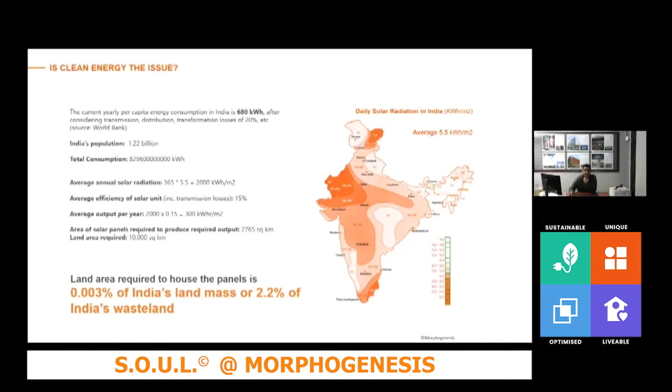We were looking at our cities, and we were looking at our buildings, and we had developed this system where our buildings would consume energy and they would consume water and they would generate waste, and it was a one-way flow. What you see on the top here is through this process of sustainability, where our main aim has been to push our projects to net zero energy, net zero fresh water, and net zero waste to landfill.

Optimization has been mostly about how do you build less? How do you do a lot more with a lot less? And essentially, that's about removing embodied energy, and that's about reducing CO2 emissions from how you build something. Uniqueness is about, again, a set of metrics which looks at tradition, heritage, and culture.

And that third philosophy and third arm grows from the fact that across India, given that price points of construction are extremely frugal, everything started looking the same. It didn't matter whether you were in a cold climate, a temperate climate, a hot climate, or a warm, humid climate. By and large, most buildings started looking the same. And that's because they were adopting processes of construction and design that allowed for that to happen. And we found ways of digging into the past to find ways to build the future. And that's where we got the unique.

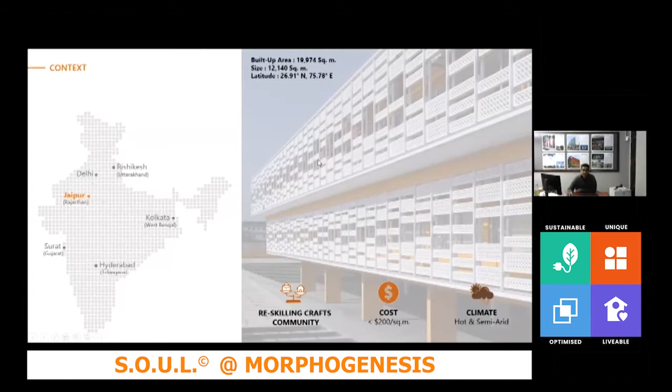And of course, a climate like Jaipur, which goes up to 48, 49 degrees Celsius in the summer, but can drop to close to zero in the nights in winter. And we began thinking about how we are going to be able to build this building. And the first thing that came to our head was to throw out the air conditioning.

Because you throw out the air conditioning, along with that, you reduce all the electrical equipment, but more so, you reduce the fact that the power generation is also done locally. So you have these diesel generating sets that generate that power, and you get rid of that as well.

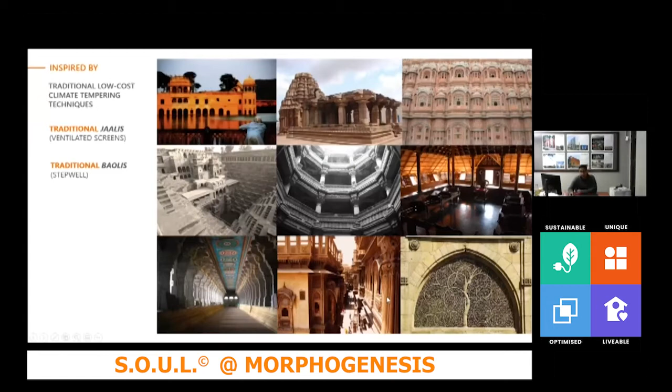And we studied a lot of the traditional architecture. We used computational models to understand how step wells work, why they are cooler at the bottom than the top. We understood evaporative cooling, jalis, ventilation, shading. So we mapped out a 200-kilometer radius. We said every material that we will use will come from that, because transportation costs are extremely heavy.

And the other thing that we discovered at the time was that the temperature of the Earth about 3 meters below the surface is equal to the average temperature of the region. And in Jaipur, like I said, which goes from 0 to 48, 49 degrees, the average was floating around 25.

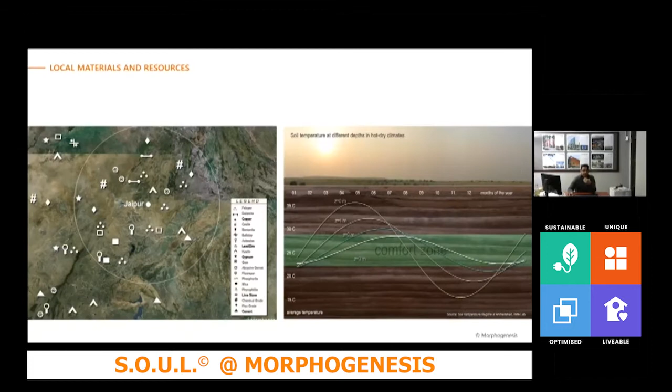And we said, hey, that's very useful, and which is why the step wells, if anyone has visited India and you go to the step well and you come down, it naturally feels cooler because the earth banking along with evaporative cooling is a phenomenal cooling mechanism. It's an underground air conditioner, naturally driven.

So we said, fine. Now, typically speaking, any institutional building in India would be built as a block, and then you would have the open space, which is the recreation space. But when you're in a desert climate, that open space is really worth nothing. And these large outdoor spaces become mostly unusable through the year.

And we said, well, we won't do our building vertically. We'll spread our building out and use the whole building as a shade, like a tree. And therefore, the space under the building will become viable. We did a very optimized, simple rectangular form. The idea was again to decrease the amount of surface area that gets exposed to heat gain.

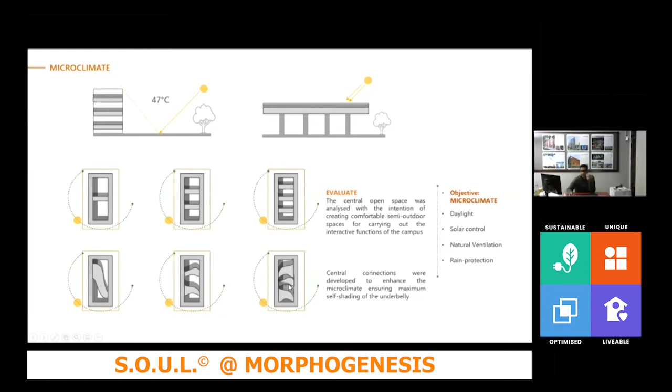And we went through a series of courtyard morphologies. The idea really being to keep the sun out, but let the daylight in. I'm not going to show you these diagrams. All of you probably know them very, very well.

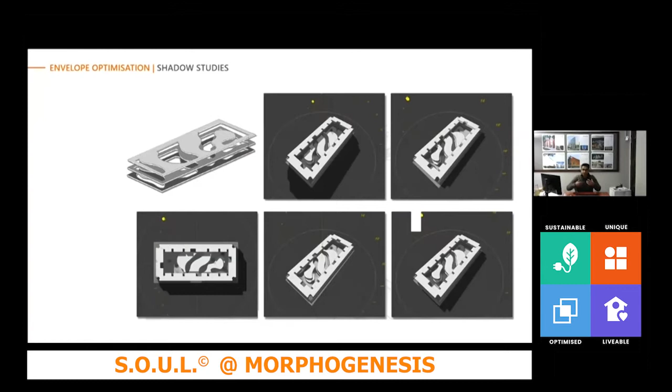But the idea really was to develop, and because it was a design and fashion school, the emotional element was that if you were inside this very rigid form, which was driven by our environmental criteria, the courtyard should not be like a rectangle and enclosed. It should flow freely like a Mobius strip. And that was the model when we began about a decade back.

To achieve the parameters of no air conditioning in a desert climate, we sunk down 3 meters. We recycle all the rainwater, and we recycle water from the toilets by filtering and using a treatment plant. And we created our own step well, a baoli, in effect, which allowed for evaporation through the courtyards and cooling the building internally. And that negative space, if I may, was pulled out of the program.

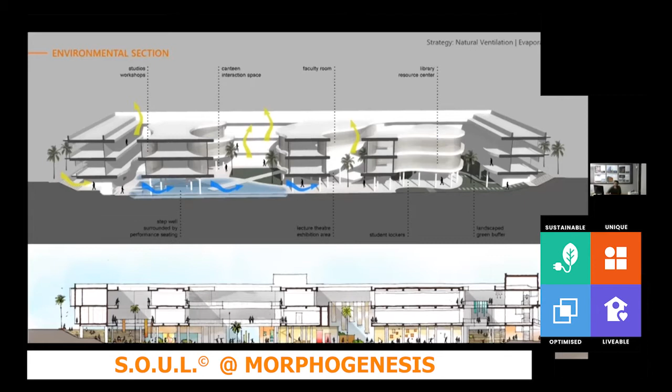So we were supposed to build about 25,000 square meters. We built about 2/3 of that. And that entire area underneath, which to date operates at about 28, 29 degrees Celsius naturally, is used for an outdoor cafeteria, for various functions, performances, etc. And that whole underbelly section was designed to do that.

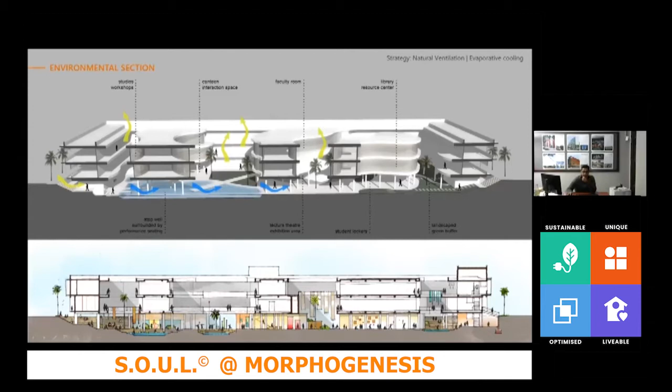These are just some of the pictures of that step well that we created. All the water is harvested. Not a single drop of water leaves the site. We were just trying to work with limited resources effectively. And obviously, the whole thing sits in shade. It captures the wind flows and it cools the building down.

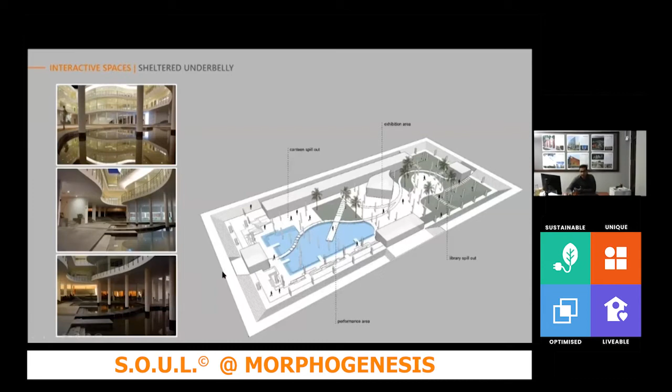We looked at insulation. Insulation was very critical for a project like this in a desert climate. And there was a local community that made pots. We couldn't afford the very expensive 50 mil glass wool or rock wool insulation. And we thought that pots, which were used traditionally, would make for great insulation, because air is a great insulator.

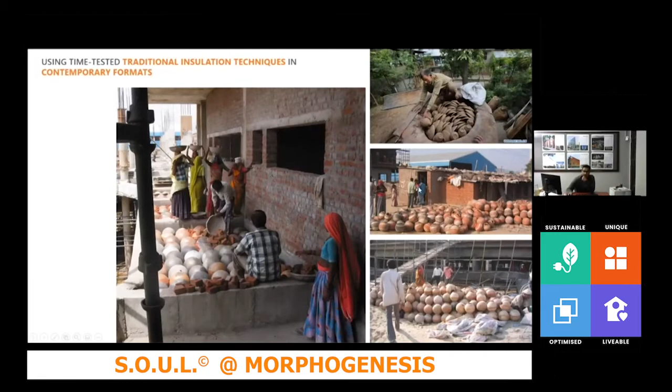And we use these inverted pots with a layer of screed on the top, and we use that for insulation. The pots were made on site by this local potter community. For the external skin, we kept our window-to-wall ratios very, very optimized. We are at about, I think, 20 or 25%, providing adequate daylight.

And we created this buffer space, which is essentially a service space and a screen. And the screen is made from, again, a set of local community who make cement concrete jalis on a very simple system. And we ran all our services on the outside. So the screen allowed for the fact that the entire windows go blinds free, and the design of the screen changes based on the orientation. And all the services are openly accessible.

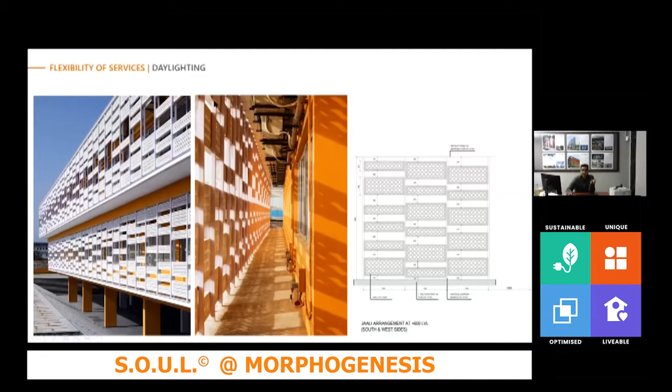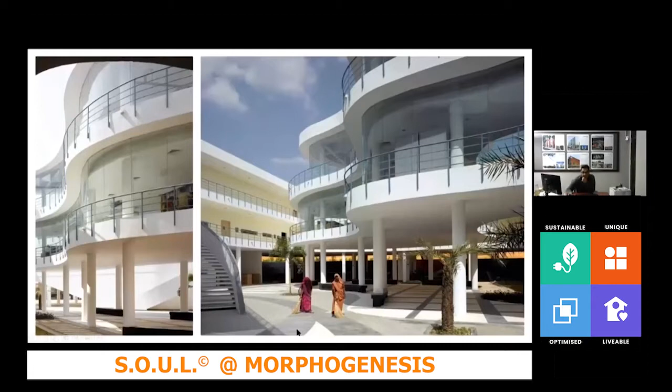The sprinklers run here. We use the sprinklers as a facade cleaning system, because once a month they are supposed to test and flush it. So that sort of cleans that up. And that's the building when it was finished about a decade back. So everything here was from within a 200-kilometer radius. We did achieve the price point.

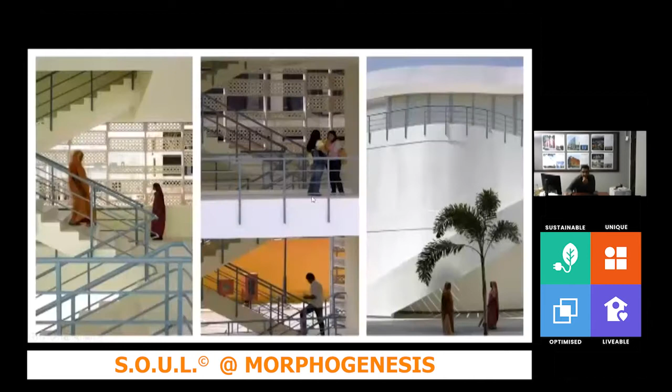And this building went on to become very popular with various schools of architecture. They've gone and studied it. We've had students from various masters programs studying sustainable design, recording temperatures and seeing it. And for the last decade or so, consistently in the summers, when external temperatures have hit 47, it's hit 29 degrees inside without air conditioning.

It runs on an energy performance index of about 25 to date. Very simply, we get the bill and just divide it out. And whilst it was being built, it gave a certain level of employment to the local community. And that gave us a lot of inspiration.

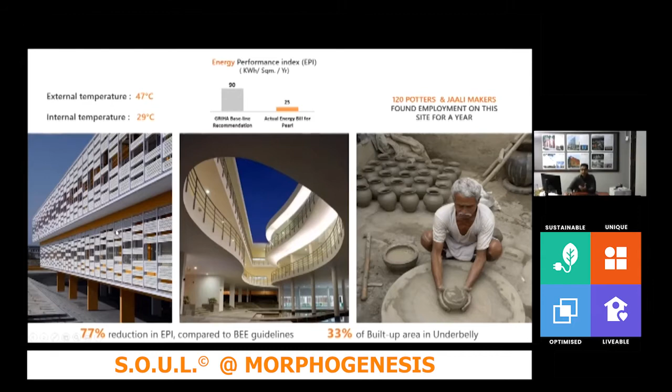And we thought that, if it was possible to get an 18 degrees delta by passive design, and it was possible to create something in these kind of price points pushed by the adversity of price, then what is it that we could do as we moved on? And that's when we started putting more formal metrics. Which is why I'll jump to a very different kind of building, which is the British School in Delhi. That's a composite climate.

And here, budget was not an issue. And our brief was, to begin with, because it was the British School, that they wanted it to be centrally air-conditioned. All British schools pretty much across the world are either centrally heated or centrally air-conditioned. And we argued that if we can achieve as much as we can naturally, then we will do so. And this project is about, I think, 6 or 7 years ago.

And we then spoke to the clients, which was essentially the High Commissioner and the board, and we said, why don't we look at this 5-acre site and try and do India's first net zero energy, net zero water, net zero waste to landfill kind of building. And they said, fine, let's give it a shot.

And so we did the math on the water, and from the 5 acres of land that we had, I'm not going to go through the calculations, but we could support a population of about 1,300 students. And we said, we'll do this in reverse. The notion of carrying capacity comes from the fact that what the land can afford in terms of water and energy is all that we will build. And 1,300 students worked very well for them.

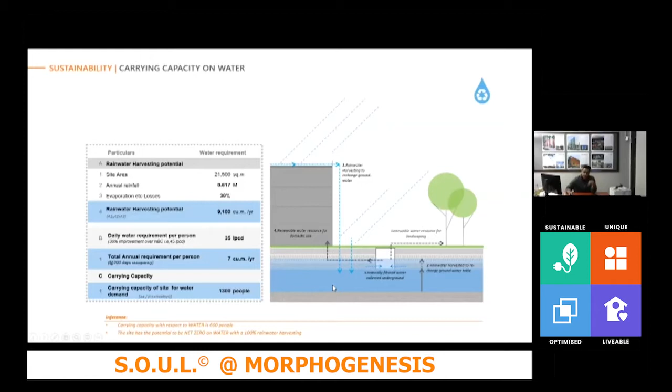Now the problem with a city like Delhi is all our rain is concentrated in 3 months. So you can't store that much water for the rest of the year. So what you do is you dig down and you find an aquifer that's pure, and you use that as an underground tank and as an exchange. So you put water back into it and you pull it out of it. And over the year, you go net zero on water for 1,300 people.

We took the same 1,300 people, and we needed to build about 20,000 square meters for fitting out an IB school. And we were trying to work out the correct ratio of rooftop solar to number of levels that we would need to get to net zero, and therefore the target EPI we need to achieve. And after a lot of to and fro, we came to a 4-story building with a target energy performance index of 56 kilowatt hours per square meter a year.

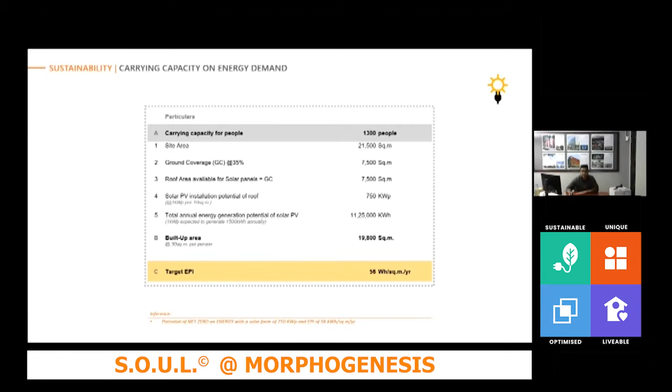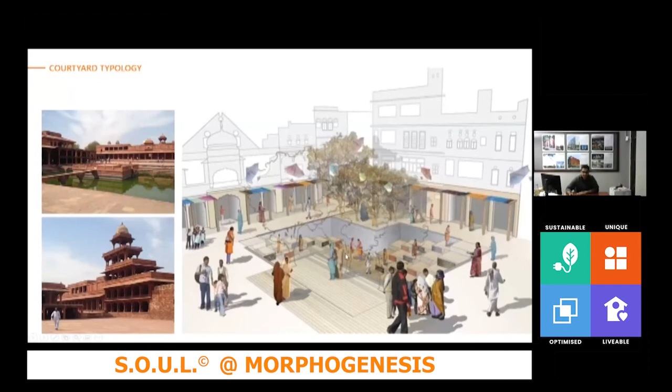Now, that number would by necessity drive a lot of passive design, where a lot of the heat loads and lighting loads would need to disappear. And that's when we would be able to be net zero on water, net zero on energy. And again, in Delhi, there's a very old city called Shahjahanabad. We looked at how those morphologies worked, how some of the earth banking worked. The other key area was safety and security.

And because we were propagating the idea of having open corridors, and we were not doubly loaded and had them air conditioned, the issue of security, CCTV cameras, and we came up with this idea. We didn't come up with it; we studied this idea of eyes everywhere. If you look at any old vernacular evolution of any city anywhere in the world, in those days when there was no police several hundred years back or CCTV cameras, the cities were designed in a way that there were eyes everywhere. And that really was a security.

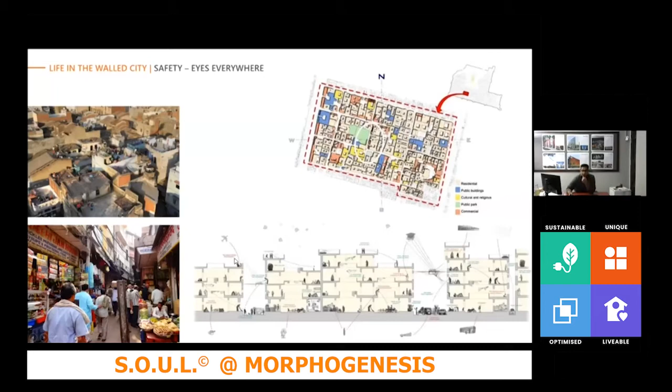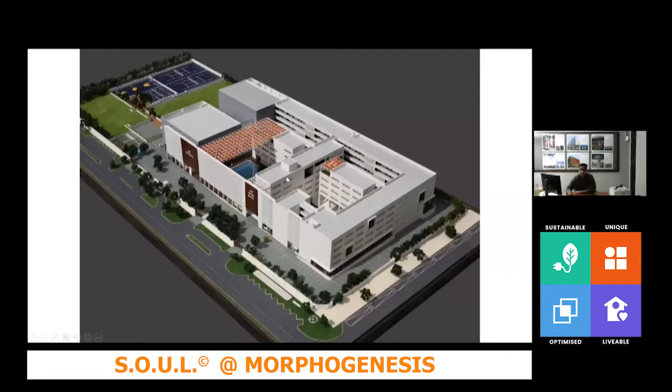So with a combination of the two factors, we began to look at morphologies where we would be able to get eyes everywhere, step terraces, shaded courts, and we landed up with this sort of model with a rooftop area sufficient to make this into a net zero energy project. Some other small things that we did: we put the labs on the top because the labs are constantly mechanically ventilated because of the fumes, and that automatically creates a buffer for everything underneath. We created natural voids for the wind flows to allow the courtyards to function properly.

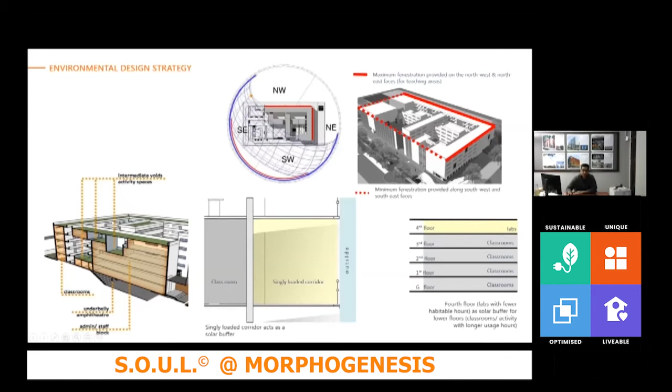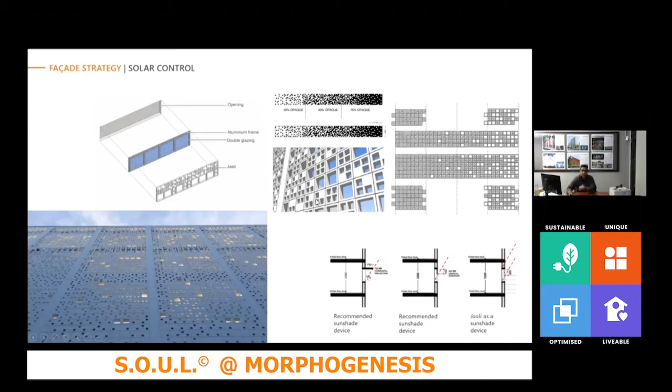And because of the orientation of the site, where we had pushed that form again like we had done earlier, we began to look at the Jali formation. Most of our teaching areas were on the northeast and the northwest, while the southwest was essentially a large screen just shading out the courtyards. A lot of this was built on site, so we came up with this construction methodology of again full windows and having a secondary screen. The screen, of course, varies its opacity and density based on what's behind it and what orientation it works to. And that's now the completed building.

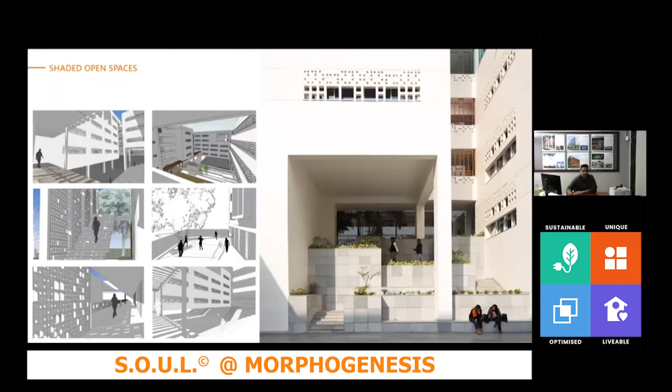We did a lot of modeling. So we had the classroom, and that was built. That was done perfectly, but to us, what was more important was to be able to create enough open spaces which would be comfortable through the year. We were targeting a delta of about 8 to 10 degrees in perceptible temperature in the outdoor areas in the school as compared to the external temperature. And then here's that project. That's the front screen that shades off the southwest and creates a cool microclimate behind.

Again, open corridors. What you see here are air filters because it was a British school. We didn't air condition the entire school, but we did for the classrooms, and then created these passive spaces. A lot of outdoor spaces. Now, this is a bit old, but the trees are grown now. And that's the school.

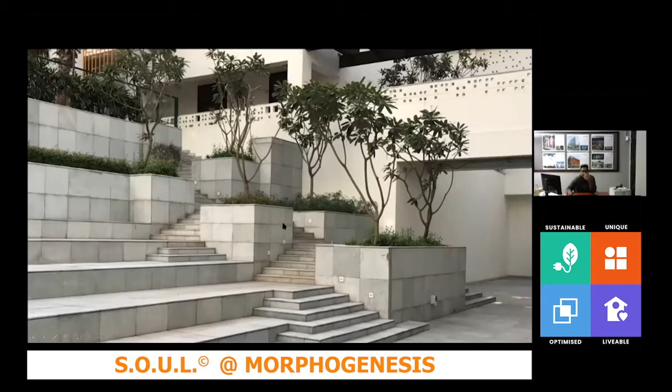Now, on our post-occupancy, we to date have an EPI of 52. It's the only school in India right now which got a GRIHA 5-star rating. GRIHA is India's own green rating system. And as I am a founding member of the green rating system, I can say that it is genuine. I didn't falsify any data, but it's operating at a 52.

Now, what you see here is a combination of surface temperature and air temperature, and then we map that back to perceptible temperature. So at a 44 outside, we did manage to get a 10 to 12 degree delta in all the open spaces inside that school. And we keep our classrooms at about 26 to 28 degrees. So there is a gradation as one steps out and moves through this entire project. And it operates today as a net zero on all accounts. So that was in that composite climate.

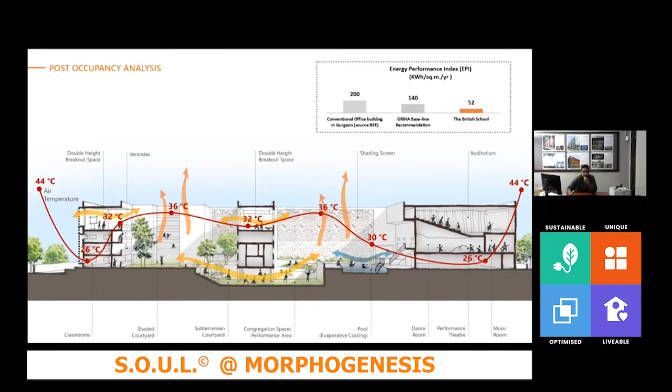In a composite climate, the winters aren't a problem. And it's not even the summer, because shade, thermal mass, screens, a bit of evaporative cooling, that works. The real problem has always been the monsoon. Why it works really well in schools is that Indian schools are shut in the monsoons; that's the holiday period. And that works really, really well, which it doesn't in other typologies like offices or residential, which brings me to this third one.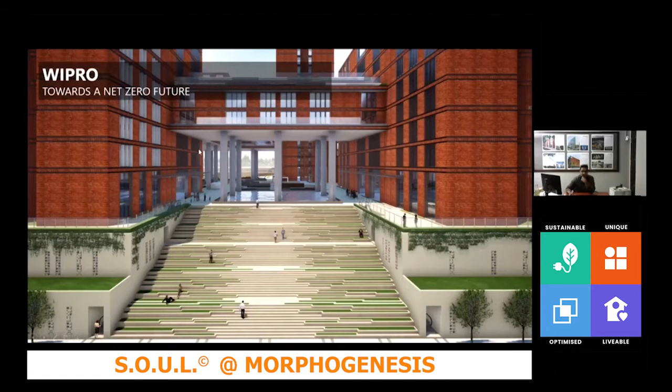This is a 100-acre campus for a very large technology IT firm called Wipro. They're amongst the three largest listed companies in India, and they do these really massive campuses, with tens of thousands of people working there. This is located in Hyderabad, in Telangana. It's a very strange climate. It's not very adverse, but it's got a tremendous amount of diffuse radiation. It has barely any cloud cover pretty much through the year.

And temperatures do go up, but it's not that high. And it has reasonable wind speeds, reasonable wind temperatures, but the glare is just incredibly high. The diffuse radiation is what pushes temperatures up. And we worked on this project with TransSolar. It's one of the several we've done with them. And this is where we began.

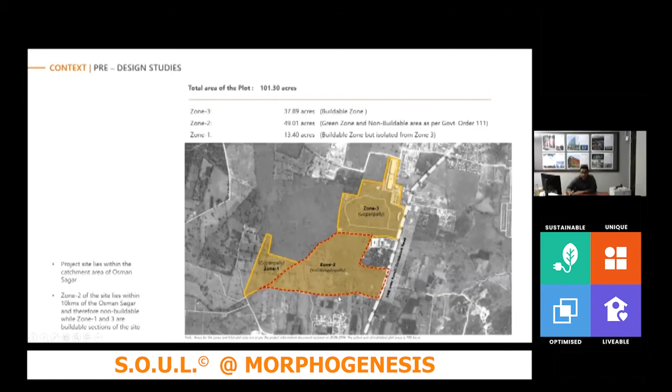So we looked at the site, and that's about 100 acres. It's divided into 3 zones. And zone 2, as we discovered, was largely unbuildable because it sat in a radius from a lake which wasn't too far away. And as we discovered, it's sort of a bit low-lying. And the really buildable areas were these 2.

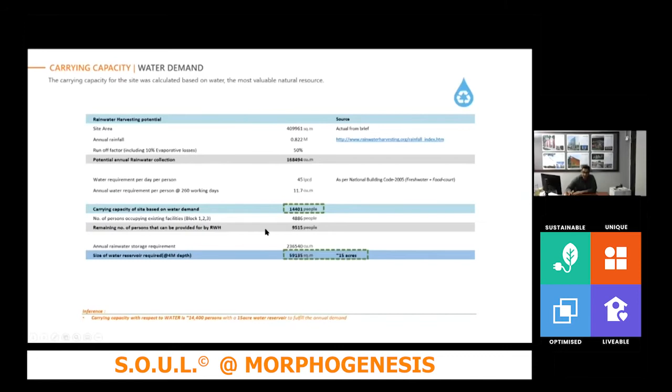We again pursued the idea of a carrying capacity. We had the 100 acres, and we worked out backwards as to how many people we can support from the rainfall. And to store that water, because, like I said, Hyderabad is very strange in the sense that its entire geology is slate rock, it was very hard to get to an aquifer and do water exchange with. So we really had to build a reservoir. So at a 4-meter depth, we needed about 15 acres of water reservoir to support 14,400 people working there.

And similarly with energy, we worked out that if we hit a 60 EPI, then with 15 acres of a solar farm, which we have planned over and above the water reservoir, so essentially the solar farm shades the water from evaporation and picks up the energy, we will be net zero on both accounts. And that's what we really did.

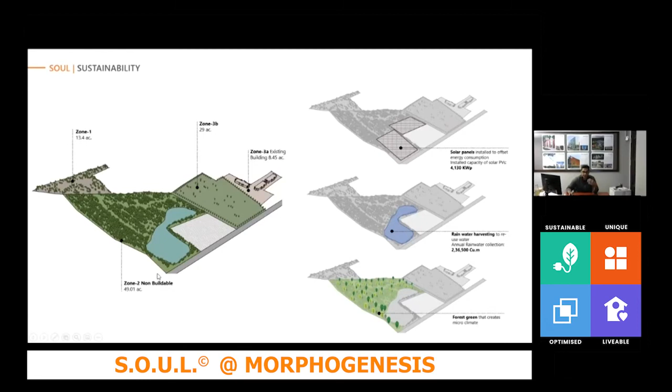So we identified the low-lying area. Everything slopes there. We got the natural rainwater. It's a 15-acre lake, about 4 meters deep. And then it's got the solar panels that sit on top of it and on the site and shade it. And that piece of the land will never get overshadowed. So we could do the solar farm, 15 acres, on the site itself. And that set up the basis of the first series of master plan.

The second exercise, as I'll just go back, was how do we begin to hit 60 kilowatt hours per square meter per year, of which 25 is on primary energy, which is lighting and air conditioning or ventilation, and the 35 is on equipment. And how do we begin to get our building to work with the 25? The 35 was a given, so that's all internal equipment.

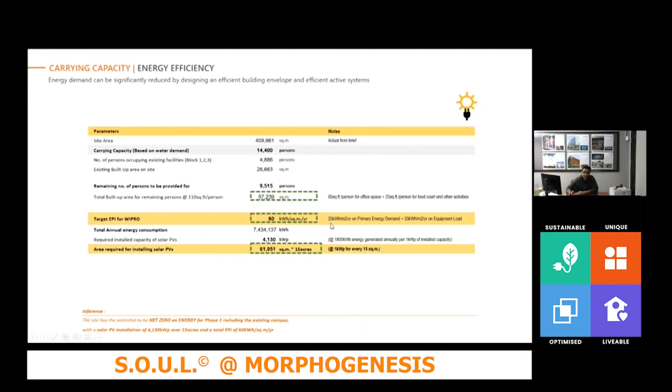The question really was, how do we work to 100% daylighting on the floor plate, and how do we bring our air conditioning requirements down through the year? And to remind you, these buildings tend to operate about 10 to 12 hours a day, 365 days a year, because they're essentially very large tech companies.

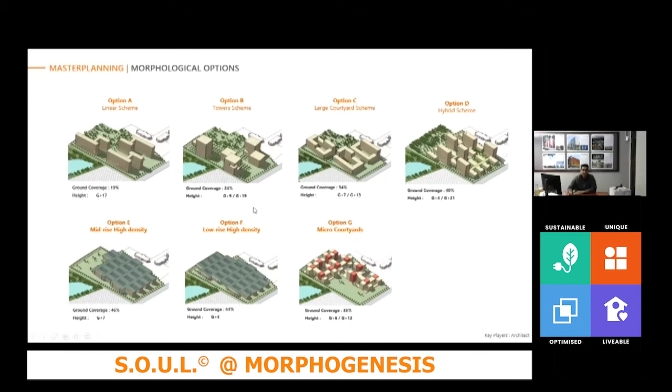So we began this exercise where we did about 7 of them. We did many more, but we isolated 7 morphologies: isolated single towers, series of square towers, courtyards, a hybrid of the tower and the courtyard, mid-rise high density, low-rise high density, micro courtyards, and we came up with several morphologies heuristically. And then we began to test them. So various kinds of ground coverages, various heights, and we then put them through a series of analysis.

So the first analysis that we did was, of course, for wind, because wind was critical. If we were to hit that 60 EPI, which is 25, we also needed to be able to get a lot of the functions from inside the building out, and a lot of the functions to run passively without air conditioning. Of course, where the essential work was happening would be air conditioned for various reasons, their data centers need very tight control on air conditioning, etc. But how much of this could be, and for that we needed the wind.

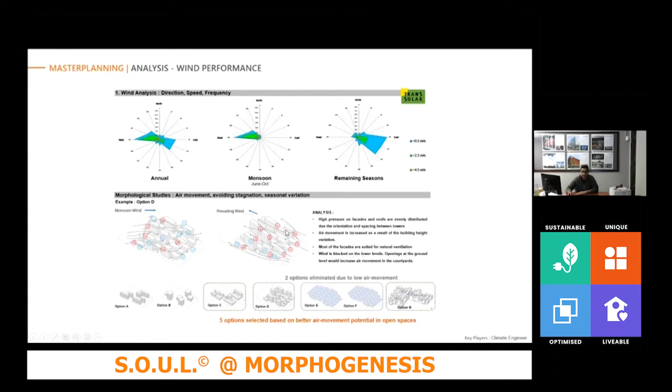Now, predominantly Hyderabad had an east-west wind, and we put all these various forms, and we selected 5 that performed reasonably well. We then put them through the horizontal plane. We were trying to look at what, in terms of seasonal solar radiation, the insolation would be on the lower planes. And based on that, we picked up a certain scheme.

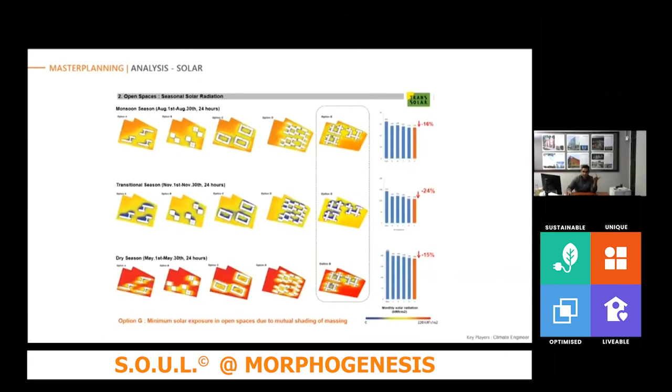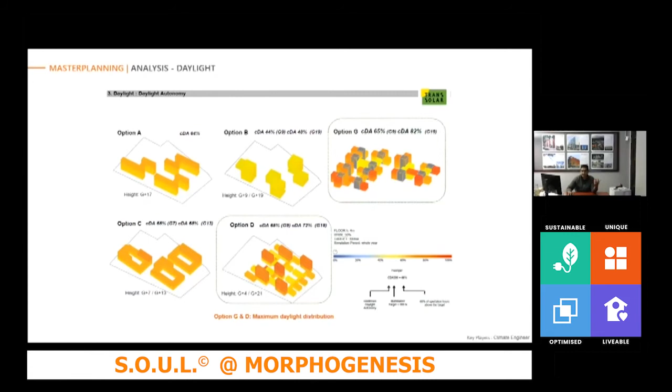We then looked at daylight autonomy for each of these 8 or 9 different schemes, and then again began to identify. And this was a highly iterative exercise between wind, solar radiation in the open spaces, and daylighting within the internal spaces, and what morphology would suit it the best. And finally, we selected the option which was the micro courtyard option.

And after doing a series of CFD runs on it, we cleaned up the entire model. Again, this was highly iterative. And if anyone is very good with algorithms, this is a great one for that kind of process. And then we finally ended up. So the first phase is what is now under construction, which I'll take you through. And we've already done the urban design for the remaining 3, so that, in a sense, the wind flows, the evaporative cooling, the shading, all those parameters remain the same.

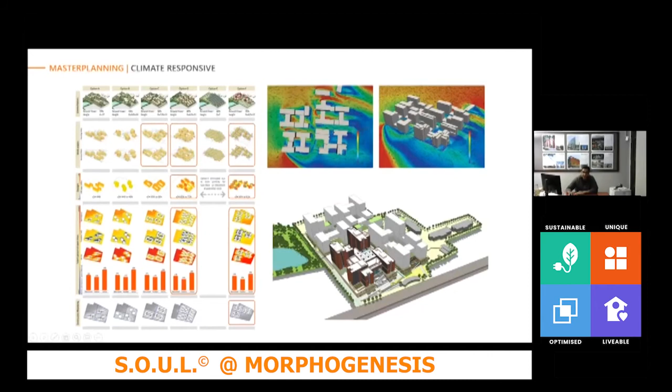Coming to that first phase, which is approximately about 1 million square feet, about 100,000 square meters. We began looking at the outdoor spaces, and we went through a series of analysis, looking at a combination of having no roof, no fans, no dry misting, and having only a roof, like a lightweight tensile roof, a combination of roofs and fans, plus dry misting.

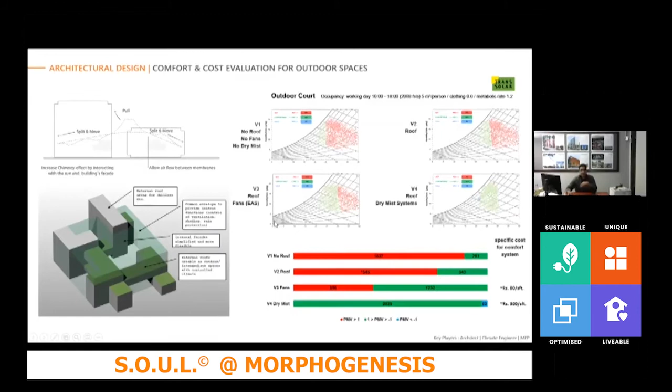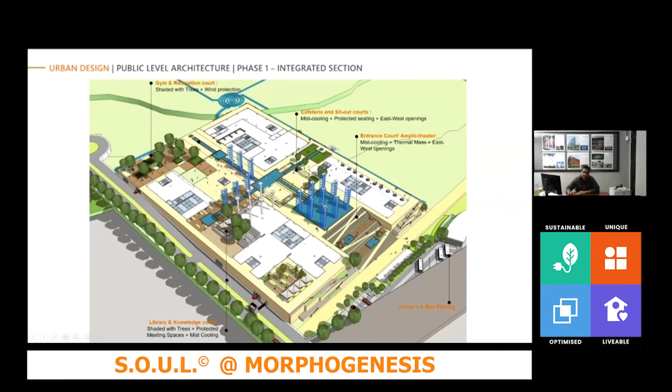And we then did a cross analysis of what would be the financial savings vis-a-vis these spaces sat inside air-conditioned spaces. And that sort of led to this design, which I call a large desert cooler, very traditional. A desert cooler is essentially what used to be there before air conditioners, a box with a fan, and you had this sort of hay on the side where water ran down, cooled it and shoved it through. And so the entire plane, which sits on an elevated podium, was designed for those wind flows and those outdoor spaces.

And we worked with SBP. We got this sort of height with this tensile roof in combination with Transsolar and us, and we got this entire outdoor space working in a way that it is comfortable through the year. So it's comfortable for rain, it's comfortable for the summer, it's comfortable for the winter. And by and large, this entire outdoor space now takes on primary functions.

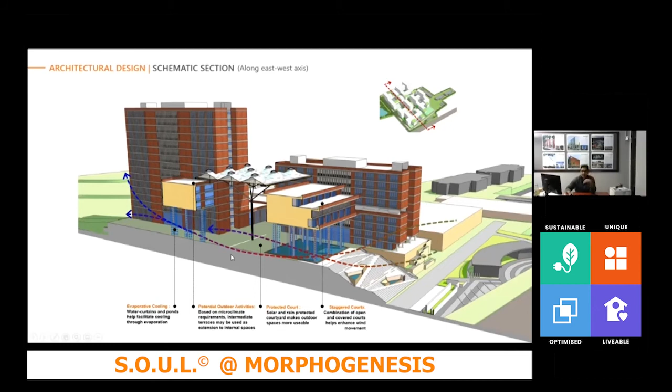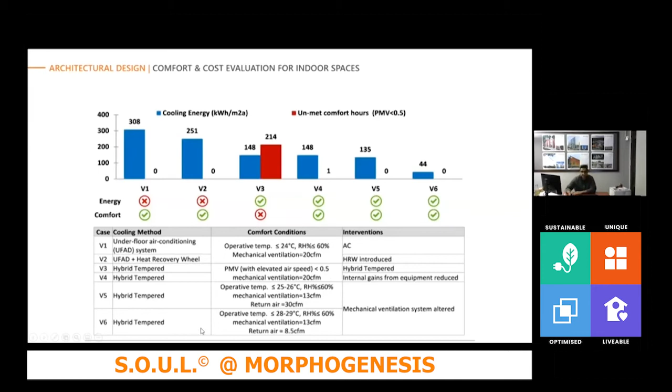I won't spend too much time on the indoor spaces. We went through a similar exercise of looking at various kinds of mechanisms of how can we remove as much air conditioning from the inside, whether it's underfloor, with heat recovery, hybrids, low velocity fans, and came to an optimal solution. Again, a lot of this is very cost-based, but it's a combination of sustainability and cost. And of course, our client agreed to an internal temperature of 28 degrees, which was very useful, and it's actually correct, because external temperatures can go up to 38 to 40 degrees, and we worked out the whole system based around that.

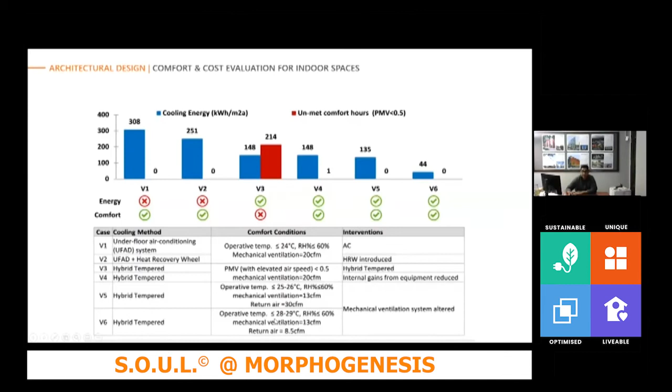So when we finished the design, 56% of the area was under air-conditioned space, but consuming less than half the air conditioning. Typically speaking, in this region, a building would consume 250 square feet for 1 ton of air conditioning. This project is operating at about 650 square feet per 1 ton of air conditioning. So even though 56% of the spaces are air conditioned, they're consuming less than half. About 35% have been moved to natural ventilation.

Now, when I say natural ventilation, and the third piece, which is shaded outdoor, all of these are achieving thermal comfort conditions through the year, greater than 90% through the year. So we managed to get about 10% of that area outside, which is nearly 100,000 square meters. So cafeteria, gym, recreation, library is in that outdoor shaded space that I was showing you. We have outdoor meeting rooms, which were removed from the inside area, and of course, the arrival plaza. And in the naturally ventilated spaces, we have various other functions.

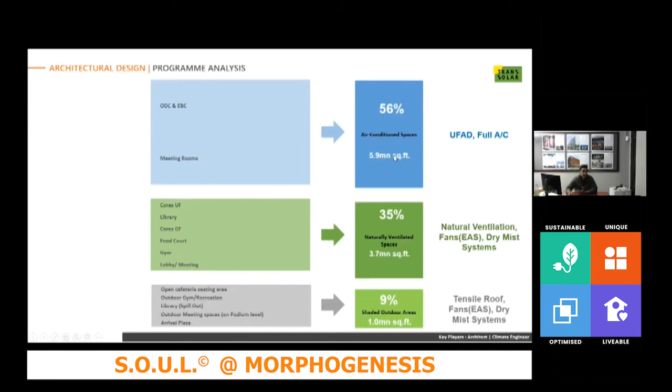So effectively, only half the building is air conditioned. And this typically would be at 100%. Okay, so a dramatically different project.

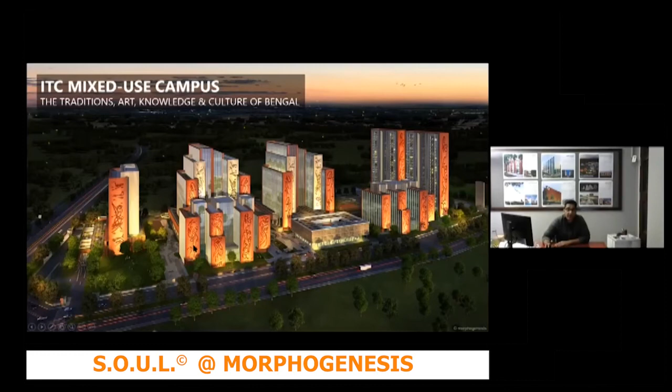This sits in Kolkata, which is the extreme east of India. It's got a warm, humid climate, extremely humid, and temperatures don't change very much through the year. It's very close to the sea, but it's also in some senses the cradle of civilization. A lot of the first universities, the first art, knowledge, culture, music, a lot of that was born in this part of the world, in this city particularly, and we began looking at the site. Now, I think the total area here is about 3 million square feet, about 300,000 square meters, and it's a 17-acre site.

Now, we did the math on this. We couldn't push this one to net zero because, like I mentioned earlier, the city maintains greater than 70% humidity pretty much through the year. And therefore, in a mixed-use environment consisting of offices, hotel, conferencing, data centers, etc., the air conditioning was inevitable. However, we started thinking about what we could do in terms of the entire site, and therefore we set up a site plan where we could maximize the wind flows through the site,

and all the buildings. Because Calcutta sits on a 22 degrees latitude, which is pretty much the tropics, we tilted the buildings 22 degrees from pure north. And what that allowed us to do was essentially shade from one side. Because when the sun overshoots, you end up shading from two sides, and it led to a 25% reduction in solar exposure. We found this very interesting. Every time you tilt a building towards the east from pure north by the latitude the building sits at, it helps cut down solar exposure naturally, which helped reduce the amount of shading we had to put into the building in the first place.

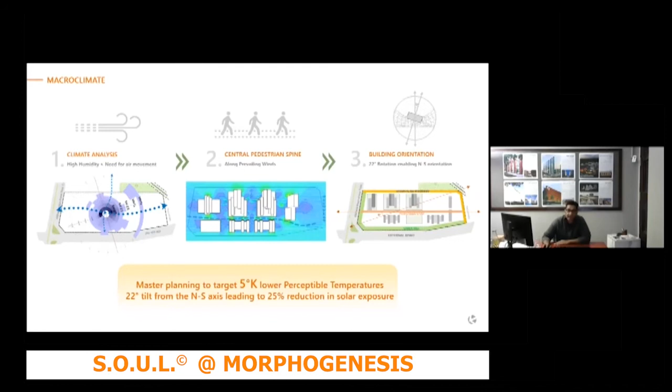Then once we had that east-west axis, we left a lot of cross axes as well, because we wanted a lot of natural ventilation. Wind speeds are not very high in Calcutta. They're at about 2.5 meters per second, but over the year, they change direction. Which is why we had to have this very free, as opposed to the previous one that I showed you, which was very fort-like, but very channeled. This had to be very open and transparent. I'm going to go to the landscape design of how that works with the wind flows.

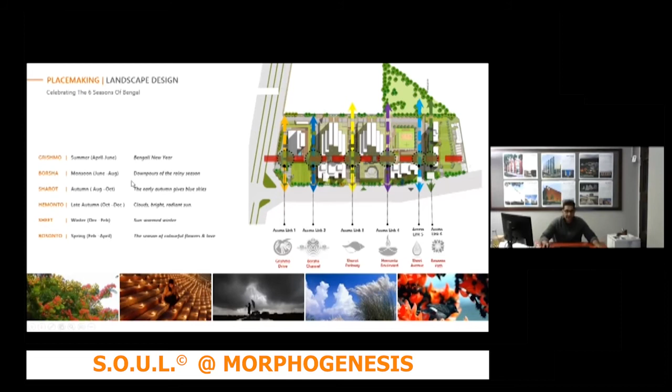The second problem that we had was a lot of this was very large floor plates, 40, 50,000 square feet floor plates. And by and large, what happens to large floor plates traditionally is that you get these very deep 60 by 60 or 50 by 75 meter deep floor plates, and your daylighting drops, on a CDA or if you're doing daylight autonomy, to anywhere between 40 to 50%. And we took the same area and we changed the morphology of the building so that we could push that back to about 90 to 100%.

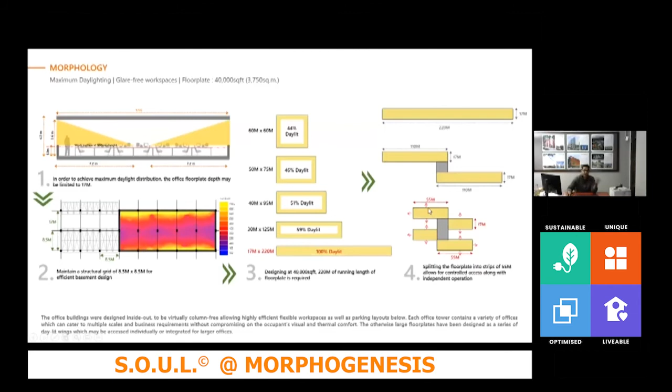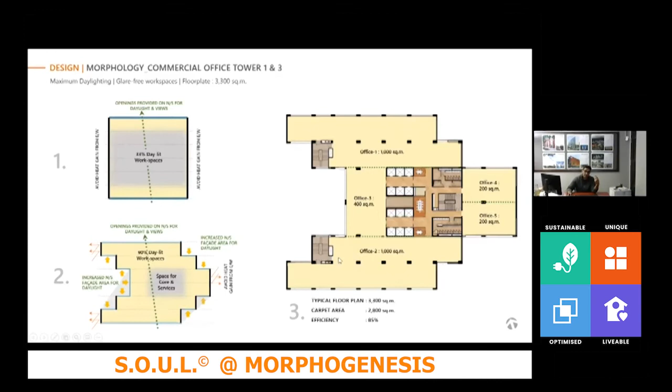And the point really about that is the fact that you don't really have to work with the form, which is a given. But if you go iterative, the same exercise allowed us to break this up into where we put our core and how the form breaks up where we get 100% natural daylighting. So that was the final piece of design when we finished up, I think, about 2.5, 3 years back. It's been in construction ever since.

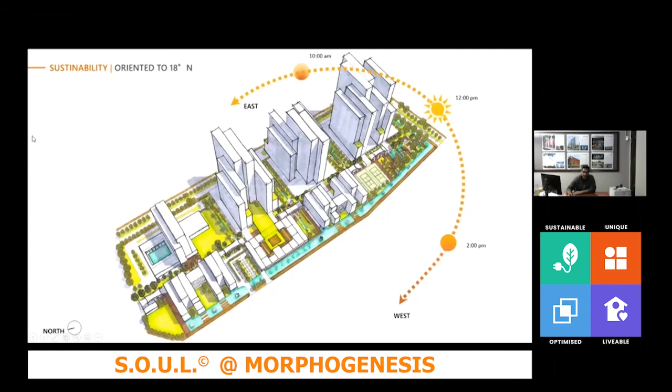So we then began to look at the fact that now we had a microclimate on the site; as you can see, it's all reasonably well shaded, it's well ventilated. We now started working with a lot of the local craftsmen. And that goes to my earlier point about how do we work with local communities? And we found a lot of tradition, art, knowledge, culture. So we treated the entire 17 acres of the site as an open air sculpture and art gallery. Naturally ventilated, naturally water protected, 17 acres of, if I may, an outdoor arts and crafts museum.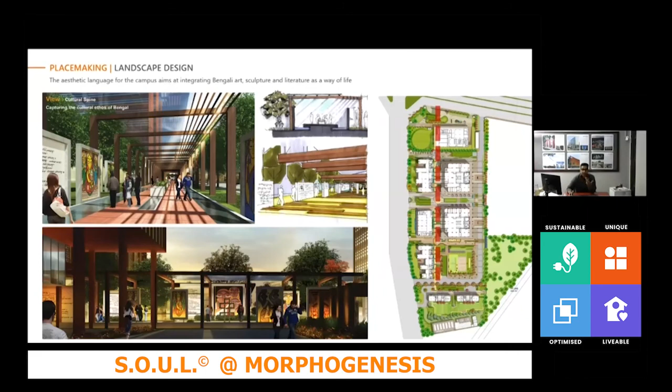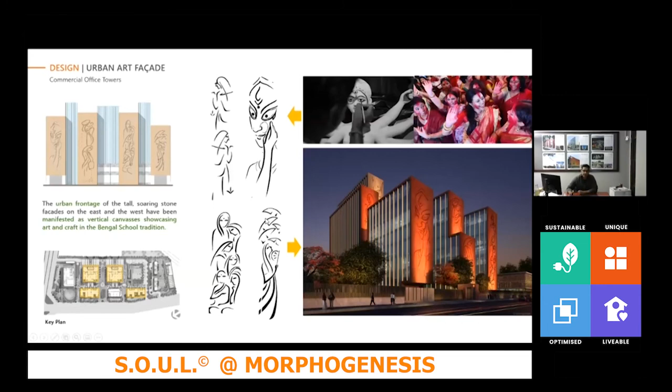We worked with a lot of the local art schools and the local craftsmen who have this incredible craft, who make all these sculptures. And we then used a lot of the traditions of Bengal, of Calcutta, and abstracted them into this graphic artwork, which the artisans could work with. And we then started using the west and the east facades, because all our buildings were north-south, albeit turned 22 degrees, and started working with them into creating this urban art form, where of course it provided great amounts of insulation, because they were just carving local stone. And of course, working with the local alphabet, and again, working with the stone.

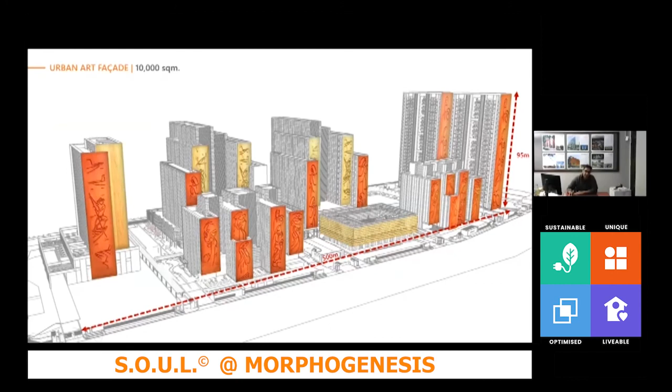And coming up with this 500 meter by about 100 meter long urban art facade. This is all west, and a lot of this being crafted by local craftsmen. And again, on the other side, on the east as well. So that's the project, again, under construction, where a lot of this is being done on site. And this we've done as a very deliberate move, because craft communities are dying communities. And I think the more we work with them, the more we learn from them. They seem to have a better heuristic understanding of what we understand computationally.

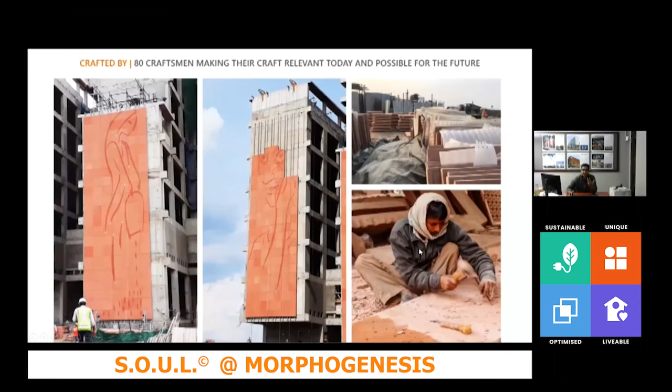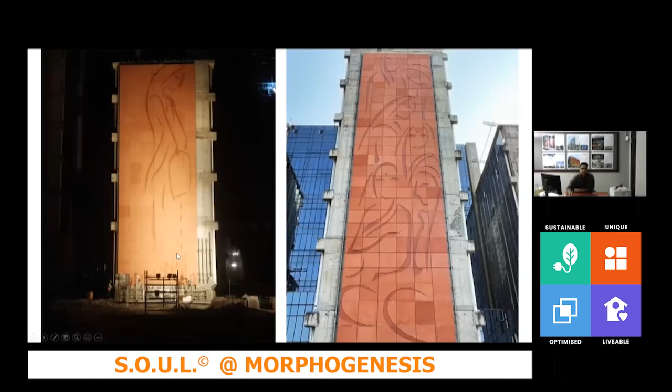And this entire 500 meter by 100 meter high urban facade is being put up by these local craftsmen, eventually leading to that on completion. So we managed, in a very, very humid environment, to get an EPI of 45 by a lot of these measures. So we are 90% daylit, zero glare, which is critical, because what you really don't want to do is draw the blinds if you get the glare and then switch the lights on, and it all goes south. So glare-free, 90% daylit, window-to-wall ratio at 25%. Our facade is at 1 watt per square foot envelope load design. And of course, the entire site is fully ventilated.

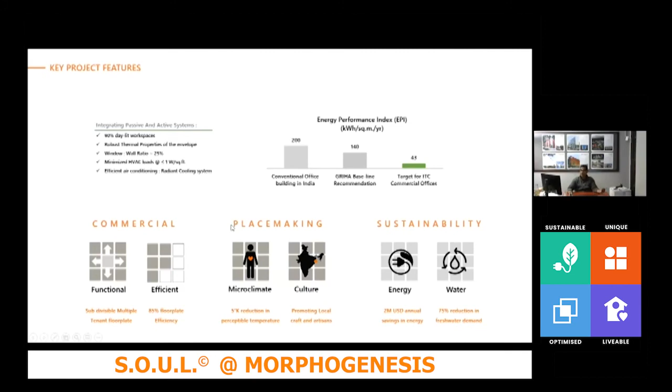Then that's how we sort of managed to hit the 45 EPI. And even in a humid environment, we've got a 5-degree delta in perceptible temperature. So at 36 degrees to a 31 with ventilation, it works really well, even when you won't stand there on the site even today.

And in the interest of time, I'm going to do this last one. It's a precious project. We finished this, and it's precious because it was done during the COVID times. It just finished recently, a few months back. And this was a project that came to us about a year and a half back, pre-COVID. And it sits in a remote area in the hills in Uttarakhand. I'm just very quickly going to go to a picture.

And we went there pre-COVID, and we looked at the community, we looked at all the local materials, we looked at how they live, and we found a very high level of resilience. And in that 1 kilometer radius from that site, we found about 800 people. There were about 150 hutments. And we said, fine, we're going to build this here. And we had a great client who agreed.

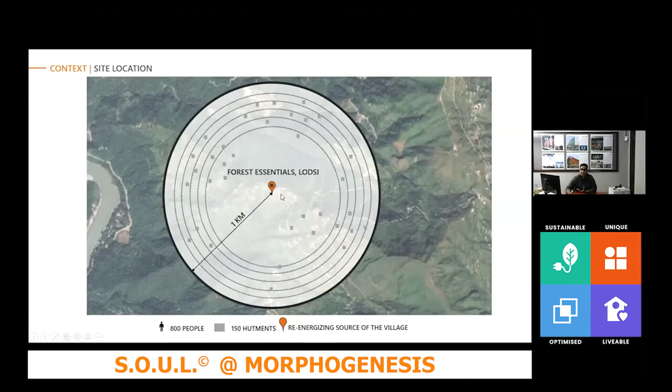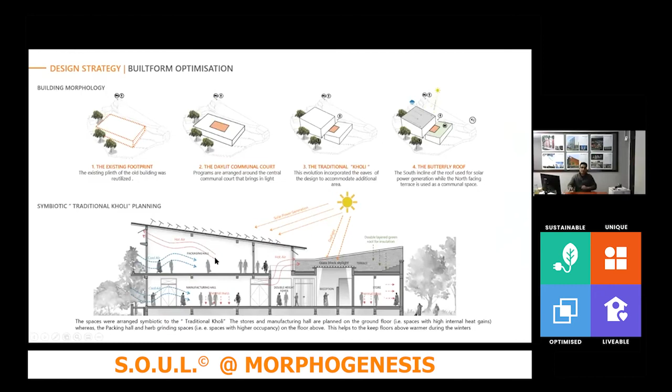And of course, it had to be completely off-grid. But also no material could come here. There was no road bringing trucks of material up here. So we built with a very, very simple form. A lot of it was driven by what local materials we had. Courtyard, south-facing for the solar panels, and then a secondary terrace for drying some of the Ayurveda stuff. Naturally ventilated, standard, good passive principles of design. Nothing very innovative, but easily buildable.

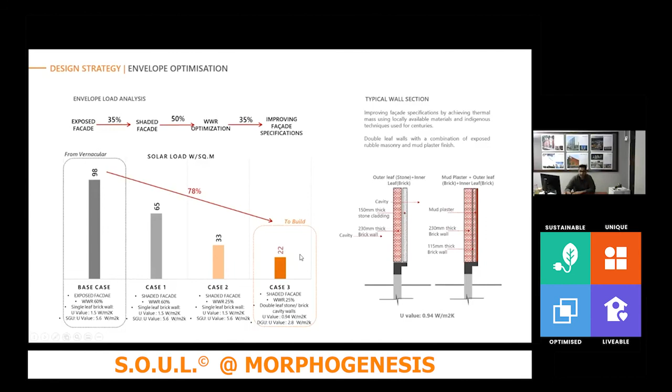Of course, we did a lot of studies pushing down the window-to-wall ratio. So glass was the one material that we had to get from a remote town. And we went through a series of exercises from the base case, which was the vernacular, and the fact that we were going to put a production factory making these Ayurveda luxury products that are exported to New York and London and Paris and are in shops on the high street.

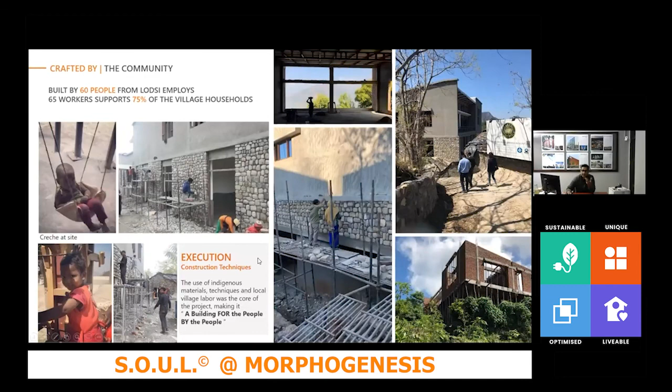And essentially, that was a finished section where, because of course it gets very cold in the winters, it's high in the hills, it's warm in the summer, we managed to get through the year a reasonable level of humidity and temperature control purely passively. More importantly, it was entirely built by the community of people who work here, and the architecture and the materials were all based around that. We learned a lot more about passive design from them, how to handle winters and summers, how to harvest the water, reuse the water.

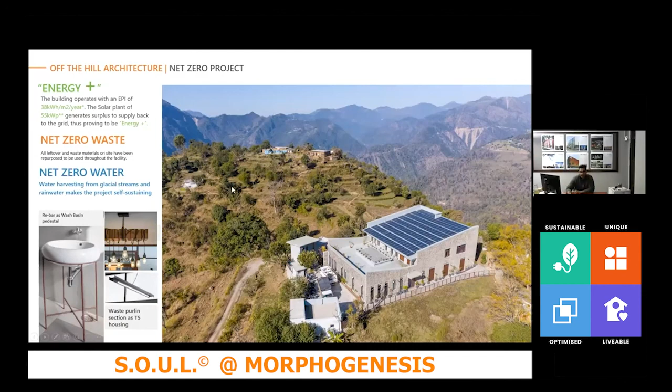And that's the project sitting off-grid, isolated. Of course, it's net zero, it's energy positive now, and supplies some power to some of the hutments as well. That's the factory now in use, low velocity fans, windows open, natural daylight. It's a project by the community, for the community, built by them, supplying a product to the global world. And it's used as a school in the evening by the same community.

And that's it. It's a two-decade history of a variety of projects across various climates and various challenges. But at the core of it has always been the same principle. We begin by thinking, what if there is no energy and water? What do we do? How do we build? And of course, you will consume. So get as much equipment out of the building, get rid of the air conditioning as much as you can, reduce your heat loads, work as much as you can with local materials, with the local communities. And that's what will give character and identity, and hopefully will lead to an architecture of resilience.